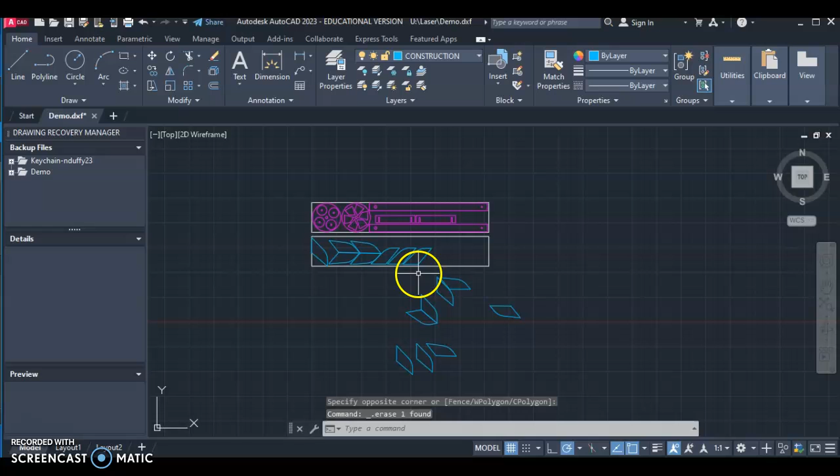So before you bring it over, get rid of any unnecessary clutter. Things that are not part of your project, things you do not want to get cut, just delete them, or at least assign them to a layer that you can turn off.

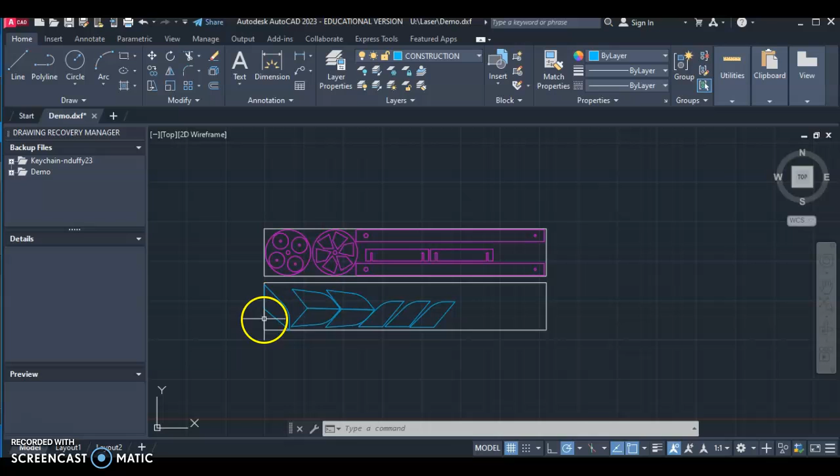Now I have two parts here representing stock, balsa stock that is 3 inches by 18 inches. Just to show you that, I'll dimension this block right here. It's important to know what you're starting with, and I recommend that you draw your stock in there. You see that's in, 18 that's on there.

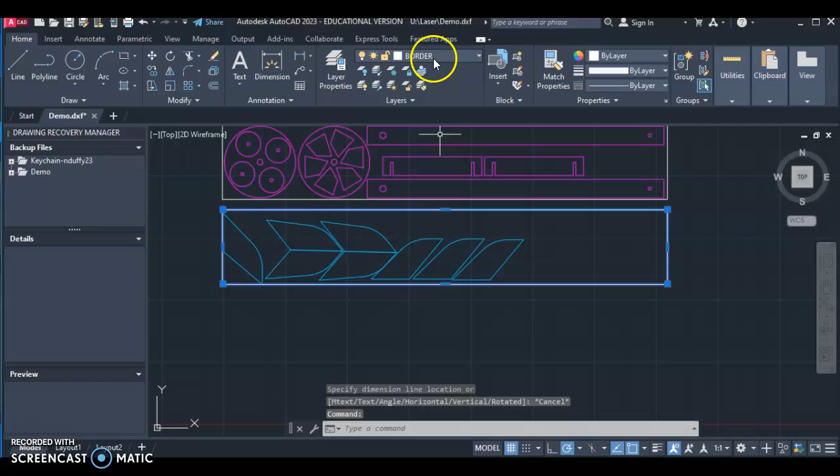This stock is drawn on my border layer. I use the construction layer for the rocket fins, and I have a completely separate dimension layer that I'm using for these wheels. The reason I'm using these different layers is because later on it gives me some control in Retina Engrave. Get your file done and save your file.

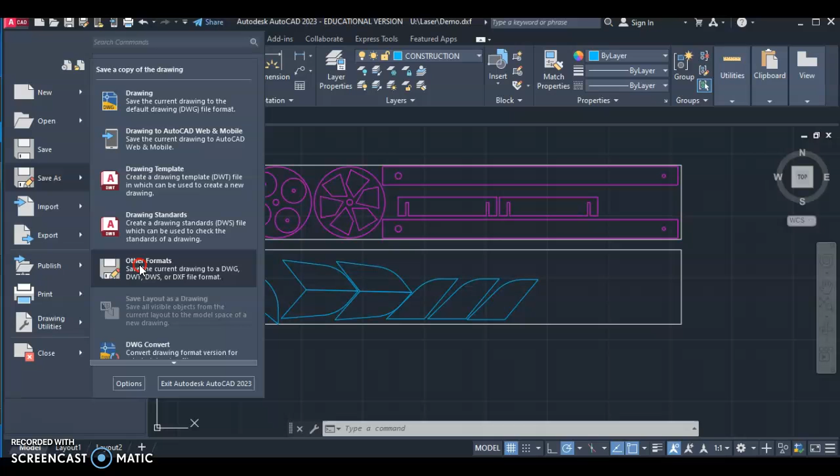Then we're going to save it as a DXF. Go up to the ACAD dropdown there. You want to save as, and you are saving it as another format. Very important, save it as another format.

Okay, and that will prompt your save box. In this drop list here, you need to go find the AutoCAD 2018 DXF file format. So I'm going to select that.

This is called a demo. We'll just make it demo 1, specific to the one that we're doing right now. So demo 1 is what we put in there, and it is a DXF. I'm going to save this. You would save it to your student directory, that's the best place to put it. I'm going to save this in my laser folder here.

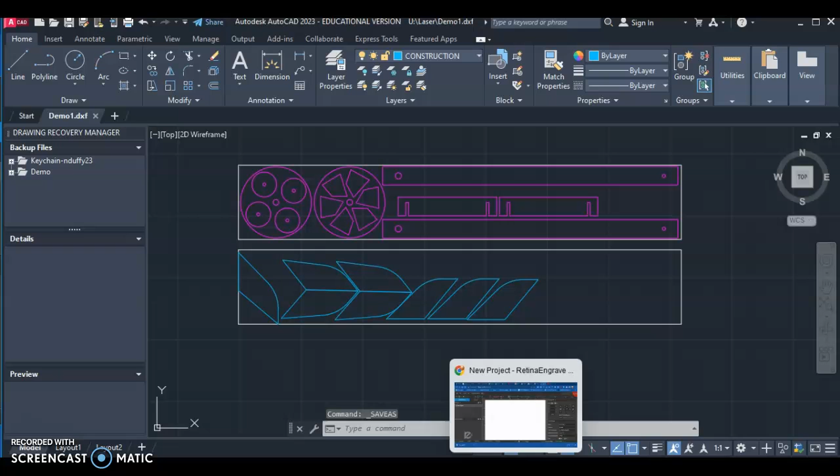So click Save. Now, launch the Retina Engrave software in the web browser. Use the IP address that's on the machine at that time. Remember, it does change regularly, so get your IP address, launch the machine, and come into your interface.

Now you're going to start a new project. New project should be up here. If it's not, do a file, new project, and once you've launched that new project, you are going to import an image or drawing.

This is where you need to find that DXF file. So here's my DXF file called Demo 1, and I'm going to open that. It'll take a bit to process what I have here.

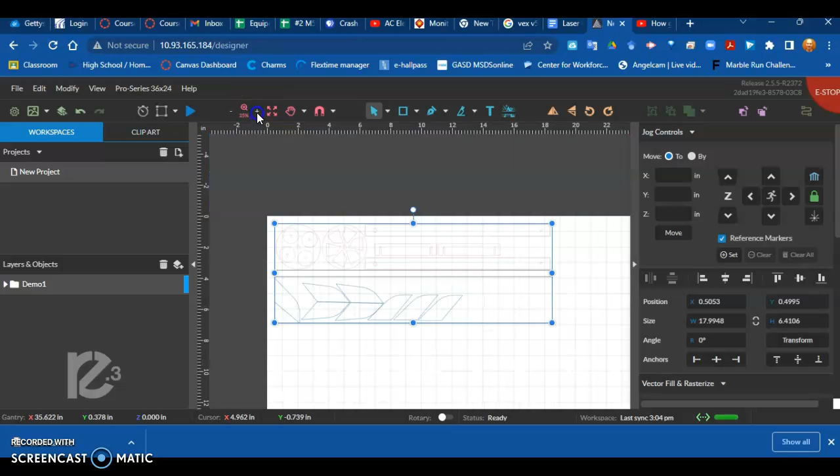It brings that in, and notice it brought everything that was on my drawing board into place there, and imported it. I'm going to zoom in just a little bit by using these plus icons here. You can pan with your mouse and kind of look around.

Now, very important before you do anything else, make sure you check the size, and notice my width here is altered just ever so slightly. 17.9948 is not quite 18. Okay, so I'm going to change that back to my full dimensional size of 18.

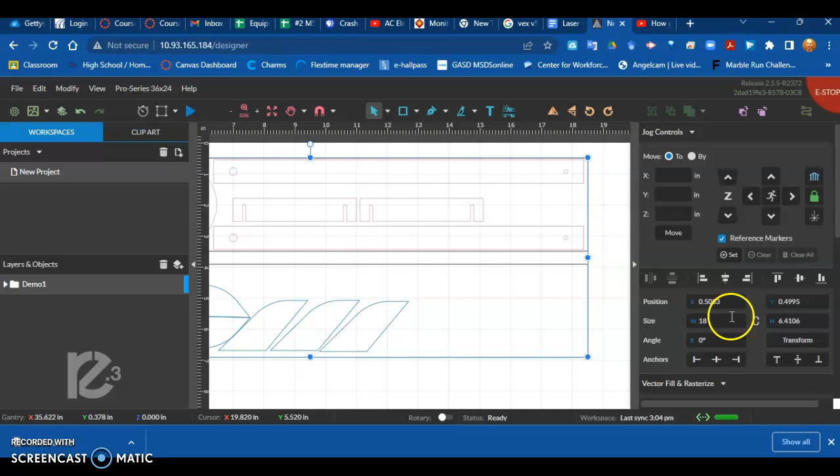I didn't check what my distance was between the two of them, but I know these were each 3 inches. Again, check whatever your width is and alter it if you need to over here in the size and positions setup.

Now your file, your DXF, is in here and you're ready to work with it as a laser project. You're going to come down to your vector and raster settings depending on what it is that you're working with.

But one thing I want to point out here is my vector layers. My black layer was my border layer, my pink layer was my dimension layer, and my blue turquoise layer was my construction line layer that I used in AutoCAD.

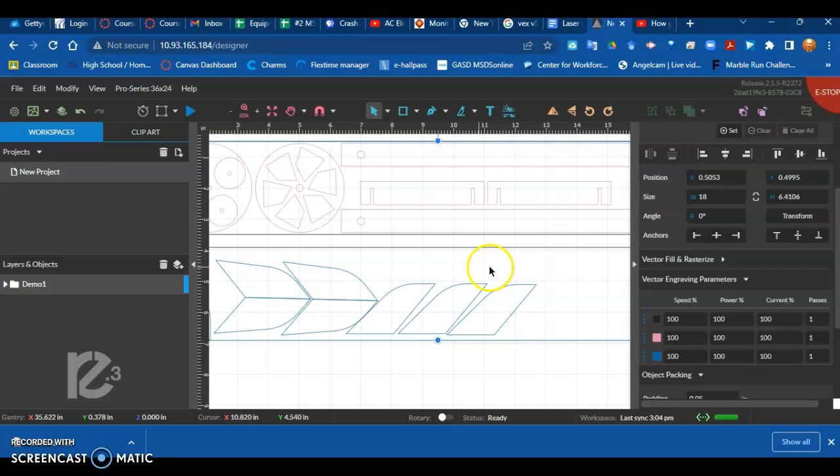I have the ability to turn off layers, say I don't want to cut my stock, so I'll make this 0 passes, I don't want the black layer to cut at all. Perhaps I'm only going to work with one piece at a time, so I could cut the pink layer or the blue layer, turn those off by setting those to 0 passes as well.

Set your power and your current appropriately. If you are using a balsa sheet, you need to back your power way down. One pass at 100%, you're actually going to probably burn that balsa that's in there. For that 1/8 inch balsa sheet, drop your power down to about 25-30% for our 120 watt laser. That will give you plenty with a single pass and still get good quality edges on there.

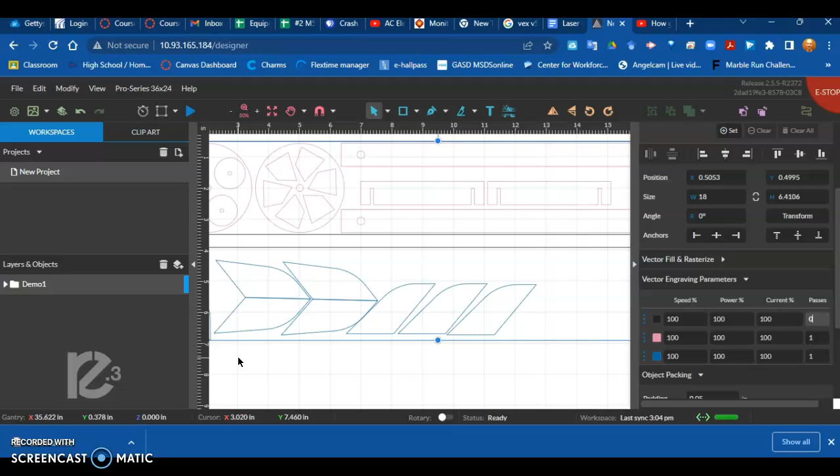Hope this helps you in setting up your laser project from AutoCAD to DXF. Create a DXF, import your DXF into RE3. Good luck.